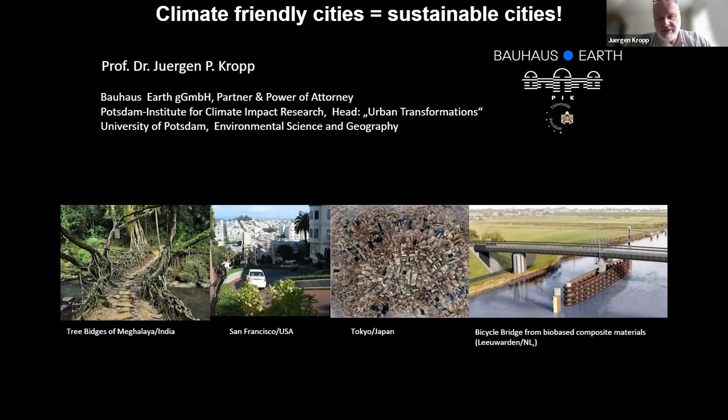Sustainability challenges and how cities are related to climate change - that's the main ingredient of my talk this morning. So before we start and go into details, let's frame a little bit the scene.

When a child is born today, in 2020, she or he will be 70 years old in 2090. If we proceed as we're doing now, still on the business as usual track, they have to live with a very high emission scenario and consequently also with a very high global warming. What we see now is that the temperature increase is accelerating even faster than scientists have expected.

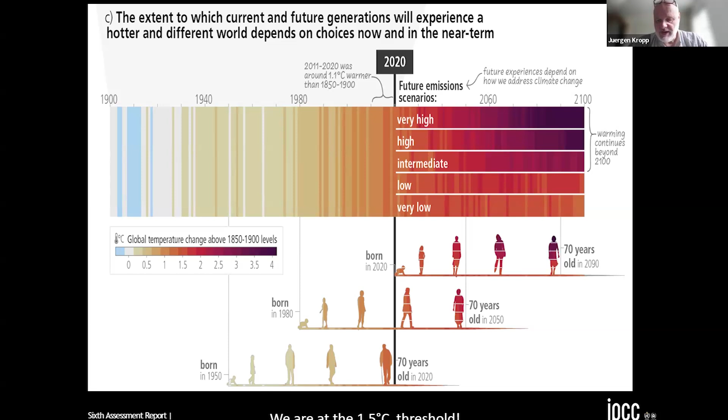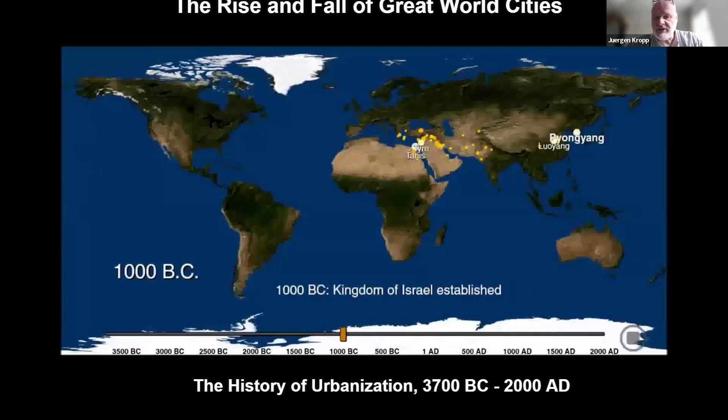But then we made a lot of technological innovations, and what you will see in a few seconds is that urban settlements were distributing more or less over the whole planet. This is a situation in which we are still, and there are no signals that the migration into cities could be stopped because of many advantages that people see in cities.

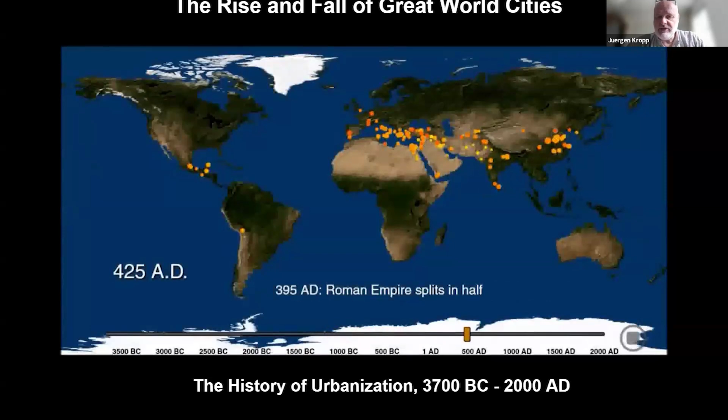Normally you can gain more income in cities, you have better medical service, and a lot of other aspects need to be taken into account here. As you see already, cities are spreading more and more, and at the end you could have the impression that the planet is only full with cities. Of course, it's not the reality.

The land cities are using is around 3 to 4% of the total land surface, but nevertheless cities are attracting huge amounts of materials. This is the end of this simulation, and this is more or less the situation we're still in at the moment.

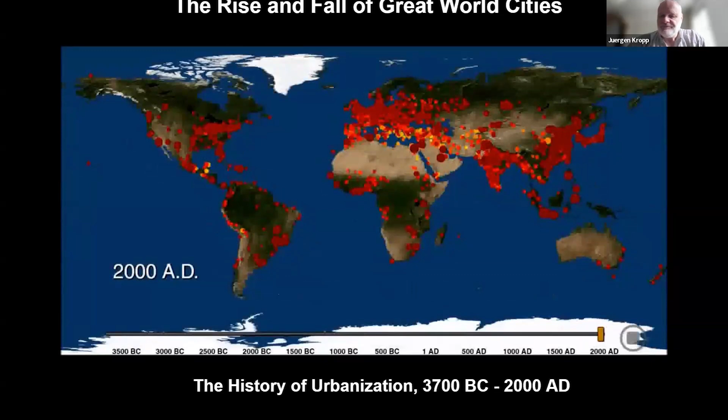If you look at what will happen in the next decades, you have to take into account that global urbanization is already responsible for 70% of global emissions. And when you look at the absolute and relative shares of residents in cities, you could say that between...

1950 and 2015, we have seen already a considerable growth, from 30% of the global population living in cities up to a little bit more than 50%, which were living in cities in 2015. If you would make a simple thought experiment here, you can estimate that per decade in this time we needed to construct new urban infrastructure for around 460 million people per decade. That was happening between 1950 and 2015.

If we look into the UN statistics and of course population growth, you can forecast very easily. We estimate that around 2050, almost 2/3 of the global population will live in urban centers. If you would do the same thought experiment, this would imply that per decade we then have to build infrastructure for around 740 million people per decade.

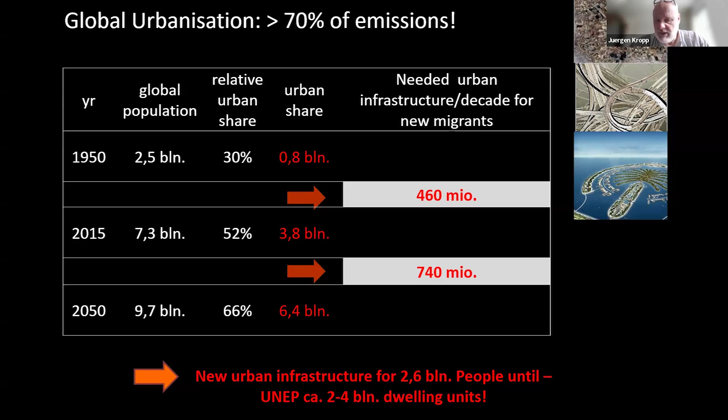The question remains, from where should all the material come from? Are we able to do it in a sustainable way so that we can reduce the emissions coming from cities considerably, and also heal in parallel the climate crisis somehow? So that's an open question.

Looking a bit more in detail at cities, we can say that cities are rather inefficient. This holds for emissions, but also for a lot of other factors, and we also have a high lifestyle normally in cities. These numbers came from the Ellen MacArthur Foundation, for instance, saying that 20 to 40% of the energy used in buildings can be saved when we construct them in a much better way compared to today.

Cities are not well organized when it comes to mobility, for instance. In any country across the world, we have a loss of up to 5% of GDP due to traffic jams only, so this is also not a small number. When it comes to mobility in general, 13% of resource consumption is related to mobility, and 90% of air pollution, for instance. Waste production is another aspect here. In other words, cities are not really sustainable.

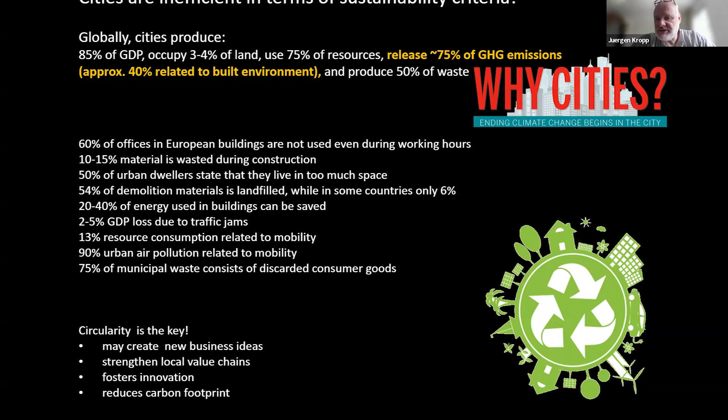This needs to be changed indeed. The wealthy countries either need to dematerialize the technical basis of their prosperity, or increase resource efficiency by at least a factor of 10. This is indeed a challenge, but let's see how this is possibly feasible.

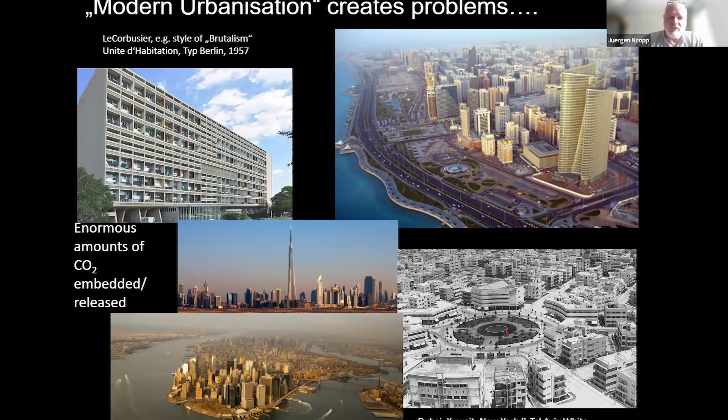So if we really would take the climate challenge seriously, then we have also to solve the global warming problem in cities, right? And we can either try to repair a little bit the climate conditions, or we can despair if we wish. But despairing, I guess, is not an option.

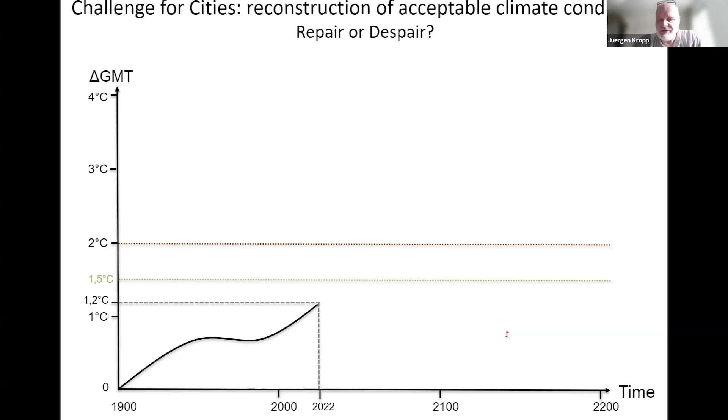So once again, let us look at what happens at the moment. These are the measured temperatures. In 2022, we had approached 1.2 degrees above the pre-industrial level. This is now outdated. In 2023, we approached the 1.5 target for the first time.

And if we would proceed with the global emissions as we are doing at the moment, the business as usual scenario, we can expect global warming of plus 4 degrees. The crux with this number is that this is the global average, and you may have heard that the oceans have an important role, because they are also cooling the global warming to some extent. When you live in very hot regions, as in South Asia for example, you could expect that the temperature over land can even double, because land is heating up much faster than the oceans.

And when you look at climate simulations, you also see it: the land temperature is always higher than that over the ocean surfaces. But let's stick on this 4 degree temperature increase by 2200.

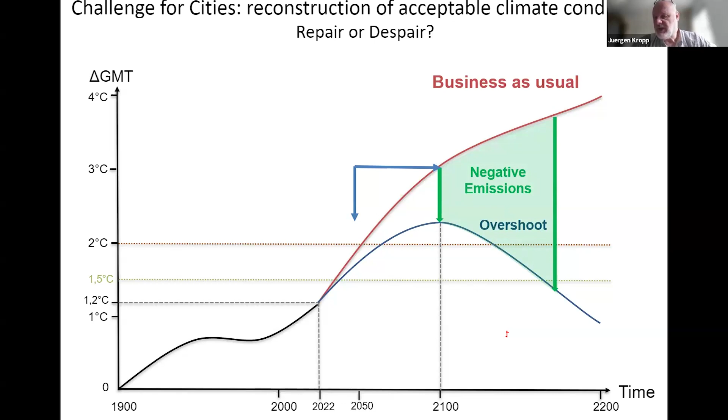With these technical solutions, we can hopefully bend down this curve, and then the system will go back to, hopefully, acceptable climate conditions.

So what does this mean? What could be the role of cities in these regards? I would say climate-friendly cities are possible, at least to some extent, if we could bring them onto transition pathways towards a sustainable bioeconomy. What does bioeconomy mean here? It means we would invest effort in the utilization of bio-based construction materials, for instance.

And we should combine these ideas with the management of forests. Forests are increasingly under pressure because of climate change and global warming. We see it in many, many places on the entire planet. A lot of people in the domain of ecology are always arguing, let's keep forests untouched because they are already under pressure.

This is still a controversial discussion. From my perspective, management of forests in the future is the only way to keep them, so to say. Because what we see in literature is that the acceleration of global warming means ecological niches need to move much faster than they could in the past. So that's a real problem.

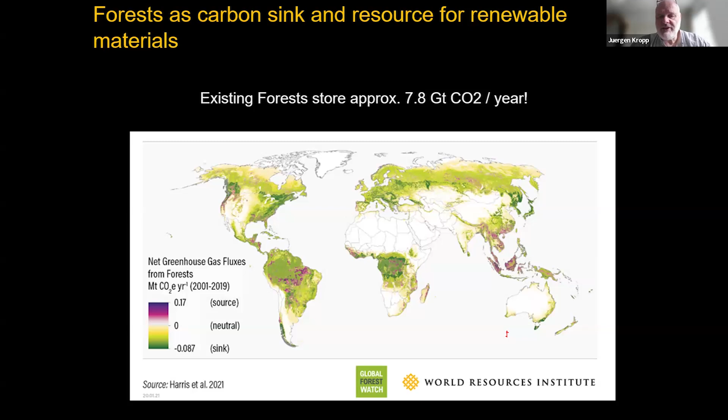Of course we can. The first idea would be to use existing barren land for afforestation. On the planetary scale, we have around 0.9 gigahectares of land additionally available for afforestation. Unfortunately, this is only a solution on a longer time horizon, because forests need to grow, and this would take decades. Nevertheless, forests are one element for combating climate change.

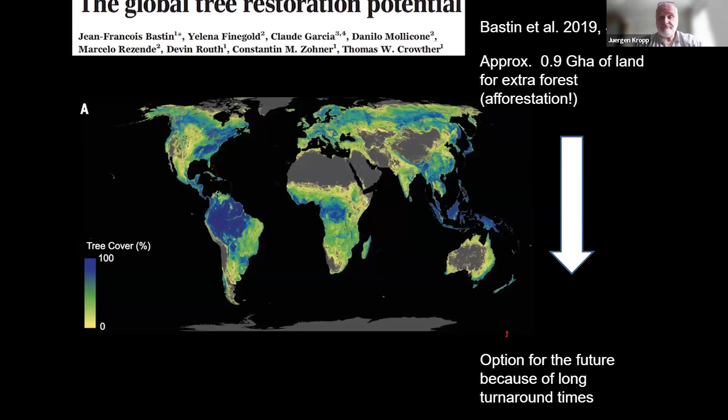The other element could be the idea to deal with human carbon sinks. What are human carbon sinks? In the past, we were mainly looking at biosphere carbon sinks like forests, but what are human carbon sinks? We are talking about carbon sequestration, for instance engineering CO2 into sinks under the ocean, and other places - technical solutions we should take into account.

But as I said earlier, we can also try to combine the forest resources or global forests and the products we take from them with some technical solutions. These technical solutions could be an advanced architecture - the idea is to use buildings as a global carbon sink. This is an article published in 2020 by some colleagues of mine, including Galina Churkina and a few others.

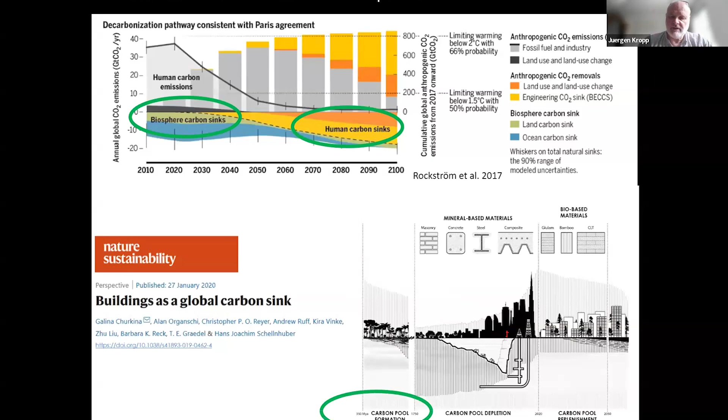So timber buildings, that's the idea. Timber buildings have been proven to be very durable and very stable, and this is a story which we have learned over thousands of years.

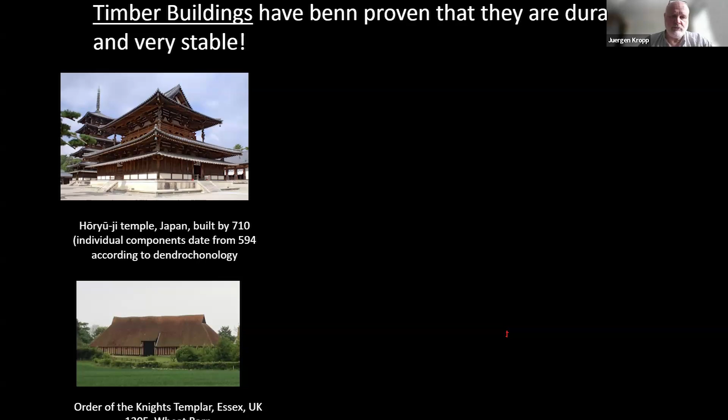So you see here one example, the Horyuji Temple in Japan, which was built in 710. Some individual components are even older, already used, built at the end of 594. This is the worldwide oldest building.

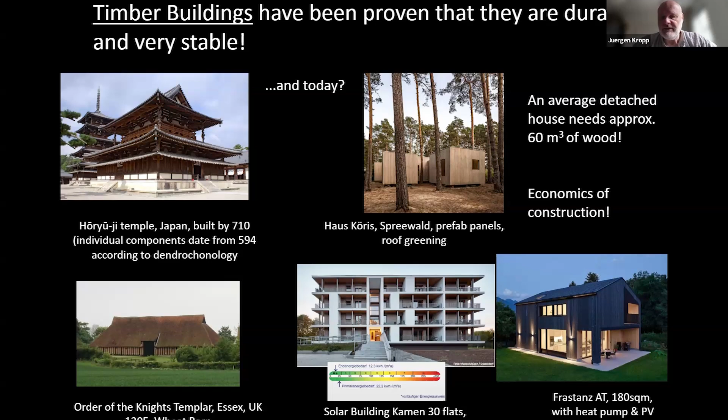You have to take into account that timber constructions might be, as I've heard from architects, a little bit more expensive than traditional buildings, but this price advantage is rapidly decreasing. When you look at mass timber production or mass timber construction, you become immediately aware that this price advantage of traditional materials like concrete or steel is rapidly going down. This is ongoing, and because timber is a natural material, this is quite good indeed. Here you see some other modern examples.

So this, the Ascent MKE in Milwaukee, is currently the highest mass timber building. It's in the United States, but it was not built by people in the United States, but by people from Austria. What they did is interesting: there was prefabrication of all the modules in advance in Austria, then they shipped them and transported them into the US. This creates some progress in terms of circularity.

Here in Germany, in Central Europe, we're doing something similar. Here you see some images from Terhalle, a company in Ahaus in Western Germany. They're also doing prefabrication in their industrial plant. You see here the walls, equipped with all the necessary electricity lines and pipes. You then can decide about your rooftop, making selections of traditional tiles or photoactive tiles. When it comes to the walls, you can also make decisions regarding the insulation material. So you have a lot of opportunities.

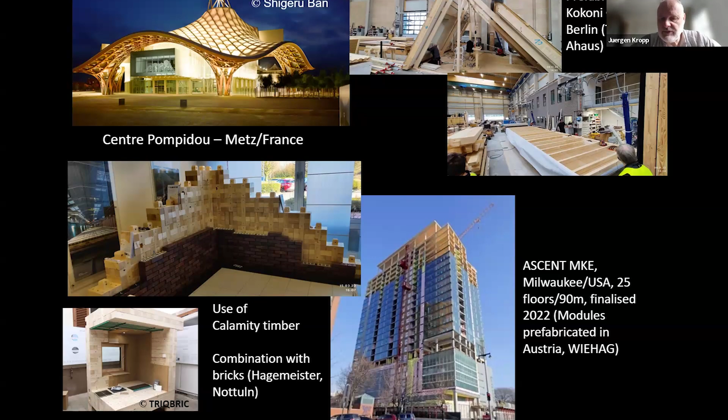But you see here a combination of traditional bricks with some Lego-type timber products, which you can then combine to form a wall. This is an innovation made by Triobric. That means calamity timber can also be used for construction purposes. So that's an interesting development here.

And when it comes to sustainable use, of course we have to think about modularity. Modularity helps us create a kind of standardized construction on the basis of standardized building modules, and these building modules you can probably use even for a second life.

But before we can do this, we need somehow material passports, which can give us information about the building module, how it was used in its first life, what the physical properties of such a module are. This is something I'm foreseeing in the future, namely when we can further develop blockchain technology, which is now used for cryptocurrencies, but we can also use blockchain for material passports. That's also possible.

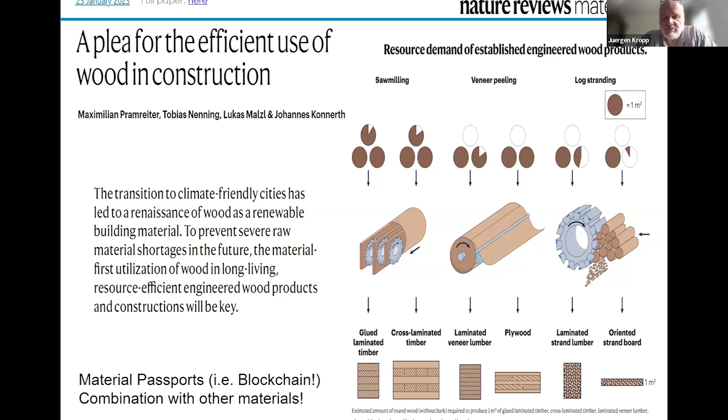Whenever we try to invest into the construction industry, we have to think about the valorization of building materials in ecological terms, in economic terms, but also in terms of socio-ecological dimensions. And we have to do it for any kind of material which we are using.

What I don't want to do here is make a pure plea for doing only timber construction. Indeed, cement and concrete will remain for some purposes, but we need to become much more efficient in the use of these materials. And if we are able to use bio-based materials, then we can make strong progress in terms of future climate protection.

When we look globally at the construction industry, we have to state that it is in a very bad condition compared with other sectors, for instance computer production, construction of aircrafts, and production of energy. So the construction industry can gain a huge amount of efficiency, and this is something we should focus on now.

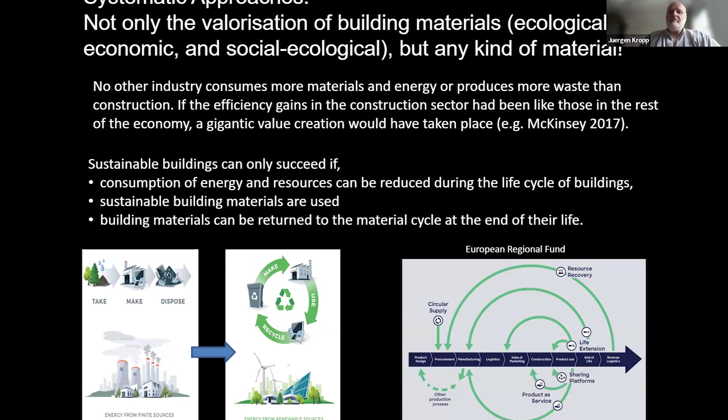So I was pledging a little bit for timber-based construction, but there are also other low carbon and low energy materials which we can use.

Here you see clay, which also has a long-lasting tradition. We see hemp concrete, and we can even use natural stone. During my last trip to Bhutan in May, natural stone played an important role there. Timber we have discussed. Bamboo could also be an opportunity in Asia, and the combination of timber and wood frames could also be an opportunity.

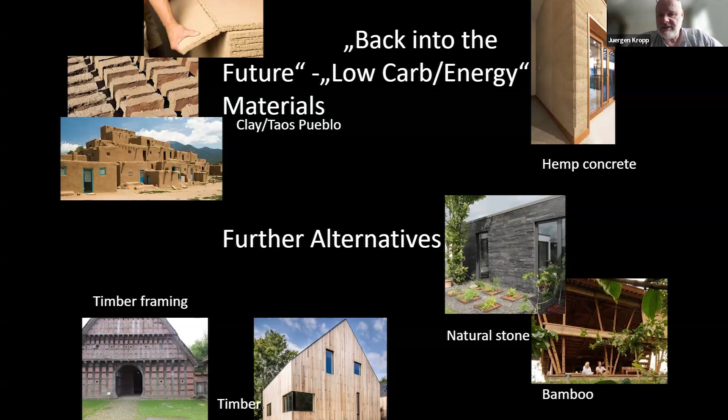So when we focus on the construction industry, we have some alternatives. These alternatives are very old, and we have made good experiences with them. But for a real sustainable city in the future, we have to combine them with the advanced technologies we now have at hand. This will bring us to a different level.

Timber buildings have further advantages. Timber buildings and framed timber buildings have a very high seismic resilience compared to traditional materials. This is well known, but not mentioned so much among architects. I'm a little bit astonished about it.

On the left-hand side you see a shock experiment done for a 10-story mass timber building at the University of California San Diego in the United States. They increased the shock energy up to 6.5, 6.7 on the Richter scale, and nothing happened to the building. In China, the Chinese Academy of Science did similar experiments with a small replica of the Forbidden City, increasing the shock energy up to 10.1. We have never seen such an earthquake on Earth with that energy, and nothing happened. Only a few bricks fell out of the walls, but that's it.

This shows that we have somehow forgotten the good things we learned from the past. We also know that timber can mitigate heat burden, something many bigger cities suffer from today because of concrete materials with a high heat storage capacity. We can globally see that cities have a higher temperature burden than the natural areas around them. The reason timber buildings are better is that timber has a lower thermal conductivity than traditional materials. This is also something we should not forget.

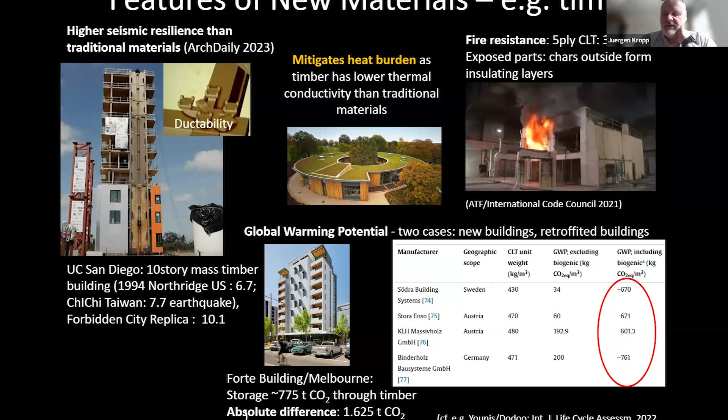This is in line with what other buildings show us here, for instance the Södra building in Sweden, Stora Enso in Austria, and a few more. So overall, timber construction could make a difference.

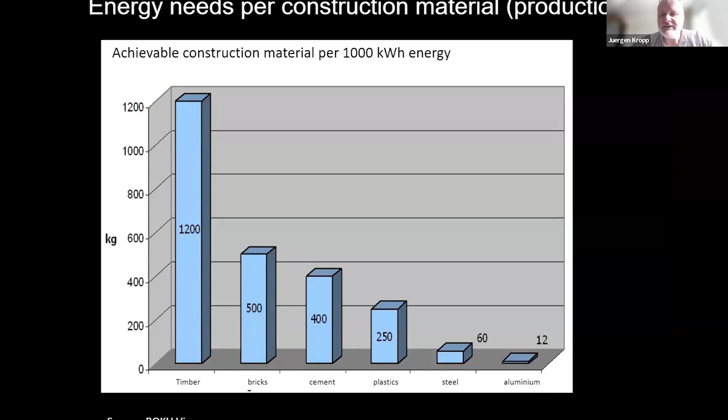So what are the energy needs per construction material? You see here how much energy we really need to invest in order to get some kilograms of construction materials out of it. Timber has the best performance compared to cement, and also plastics, steel and aluminium, other materials which we are using, it goes almost to zero. In other words, cities are quite inefficient in terms of material use, but also in terms of energy use.

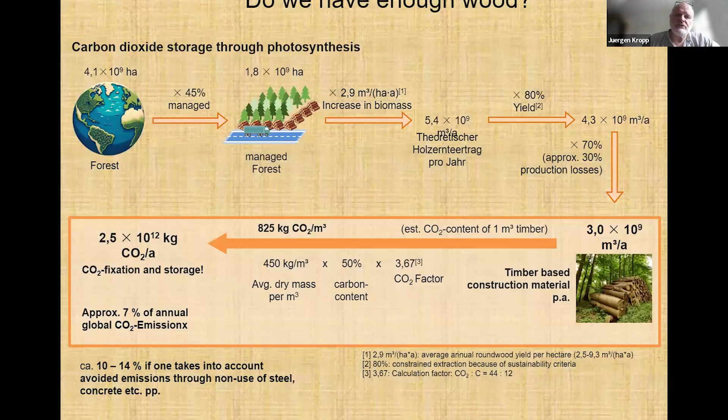This calculation is a very rough one indeed, but nevertheless it goes in the right direction. If you then finally try to calculate how many dwelling units you can construct with this material, you may see here another very rough calculation. Remember what I said at the beginning, the UNEP is estimating that we would need around 2 to 4 billion additional dwelling units by 2050 because of in-migration into cities alone, new urban residents. You see now here how much we can do with this amount of timber: in principle, we can construct around 3 times 10 to the power 7 family houses per year.

When we multiply this by 26 years, at the end we could create or construct around 2.3 billion dwelling units by 2050, and this is more or less in the range of what the UNEP is demanding. So in principle, we can do all the construction which we may need in the future on the basis of timber products.

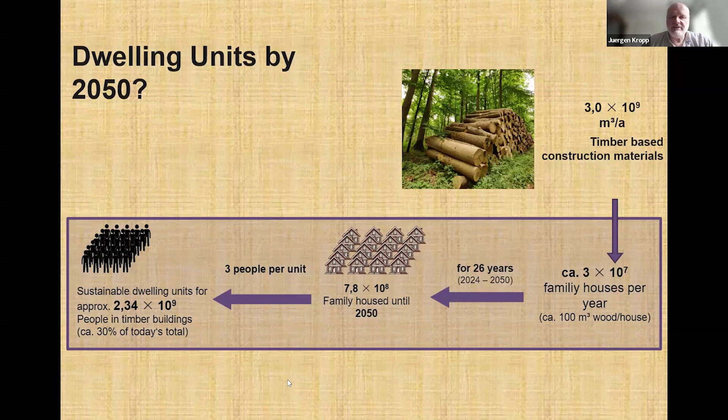But I was talking most of the time for now on new buildings, and this is definitely not everything, because we already have a lot of existing infrastructure, and this existing infrastructure we need to improve. There was an interesting book written by a German architect, called Verbietet das Bauen, which in English means forbid building.

You see by the administration of the Berlin Zoo what this means. They don't want to ban the building industry completely, but they made a pledge for doing the right renovation, and this is one example. You see here the global warming potential, and they applied three different scenarios to this building.

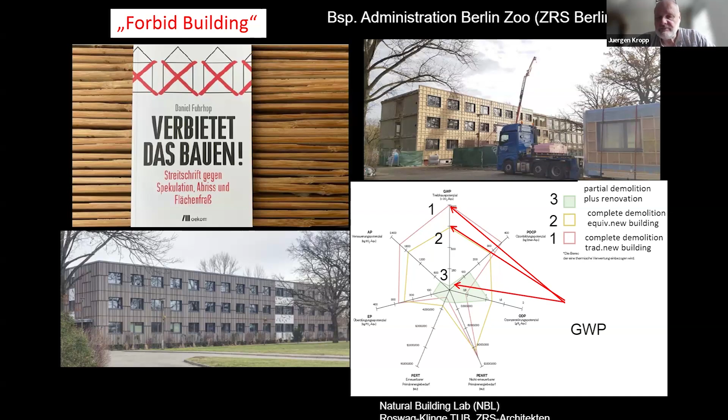The complete demolition and substitution with the timber building still creates some emissions, but not as high as a traditional building. The best opportunity here is indeed to keep the core of the building and equip it with sustainable materials. In other words, don't start with demolishing all your existing infrastructure, that's really stupid.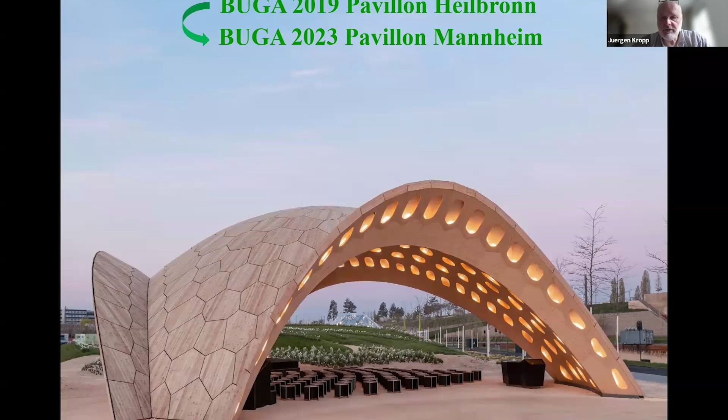That means also when you do buildings and infrastructure like this in the right way, on the basis of modules for instance, you can easily move it from one place to another.

Let's finally talk a little bit about the reality, so how we are using timber. We have a misallocation of the materials indeed. What you see here by this example is that almost 30% or up to 50% of all the timber products at the end are being used for energy production.

That's rather stupid because, as I have shown you, timber is a very valuable material, so we can use it for a lot of different purposes. When you look at what happens on the European scale, you see that even more than 90% of all the timber products end up at the end for energy purposes. This is something that can be changed, definitely, and should be changed indeed.

That means the pledge for using more bio-based materials in city construction would also need to change some existing market mechanisms. As we all know, changing market mechanisms is not easy, but nevertheless, if we really want to make a step towards sustainability, we have to do that.

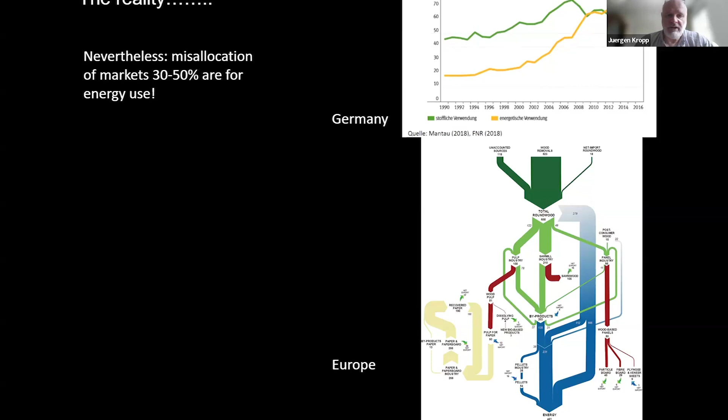Just to make a comparison between country and region: this is Nepal indeed. I have taken some data from Saga, and he was providing us information about forest residuals and logging activities, estimating that the total potential in Nepal is around 80 million tons of timber products per year.

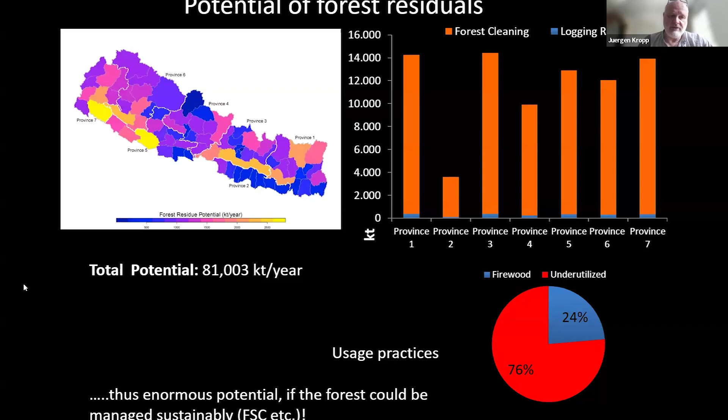But most of the material is not used for timber construction at the moment. Nepal has an enormous potential if forests could be managed sustainably, so that's an open issue here. Comparing this with Europe, where we have certification of forest products up to 90%, or 95% if possible, of all the forests, it's just the other way around in Nepal. This is an area where we can improve things.

But if you compare this with the forest yields in Germany, we are in the same range. When it comes to round wood, we are also taking out of our forest around 80 million cubic meters of products. If you would calculate this, if you would use all these materials in house or dwelling construction, you can build around 600,000 to 700,000 dwelling units year by year, which would then probably store between 35 to 40 million tons of CO2.

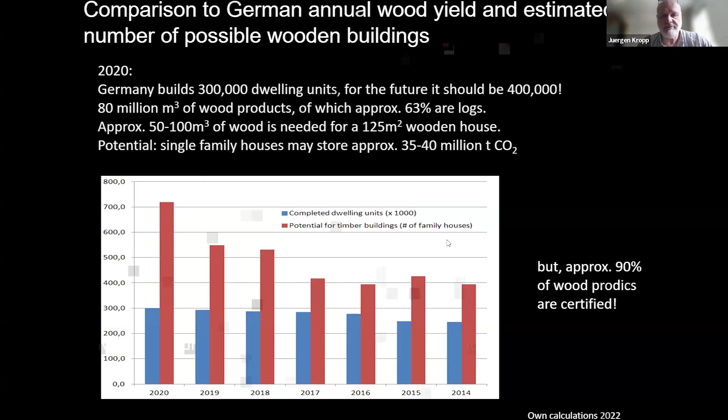This is really a success story. So what does it mean when we talk about circularity? I will come to an end now. Circularity means in principle, and this is hopefully what I have shown you a little bit by the example of the construction industry, that we have to understand the life cycles.

I have shown you that at the moment still huge amounts of timber are not used adequately, we are burning it, or using it for heating our homes, or burning it for electricity production. That's really stupid indeed. We have to recycle materials, and if we cannot use them anymore, we have to decompose materials and then seek ideas how the materials can be reused. But we also have to think in terms of new materials and establishing sustainable value chains, and for forest and timber products, indeed, this might be possible, as I have shown you earlier. This is something we have to do in the future.